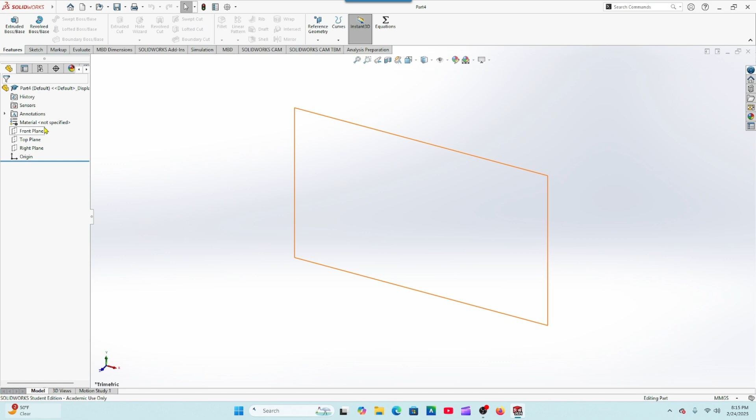We're going to go ahead and open this in the top plane. And I'm going to start with a circle here. I'm just going to do 2. And then I will do one more, like so.

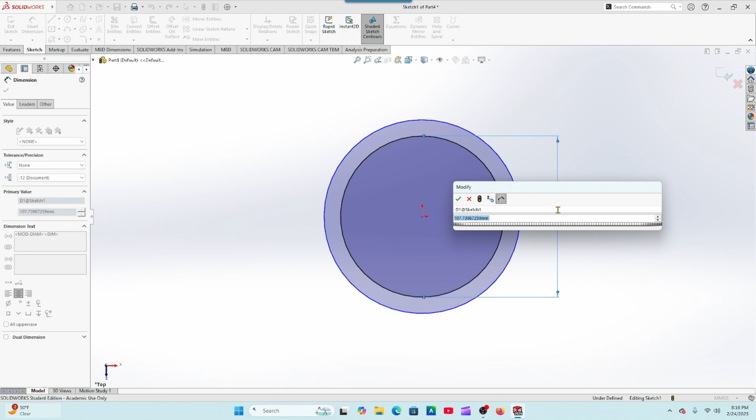And then what I'm going to do here is I'm going to do this one to 145. And then I'm going to do this one to 160, like so.

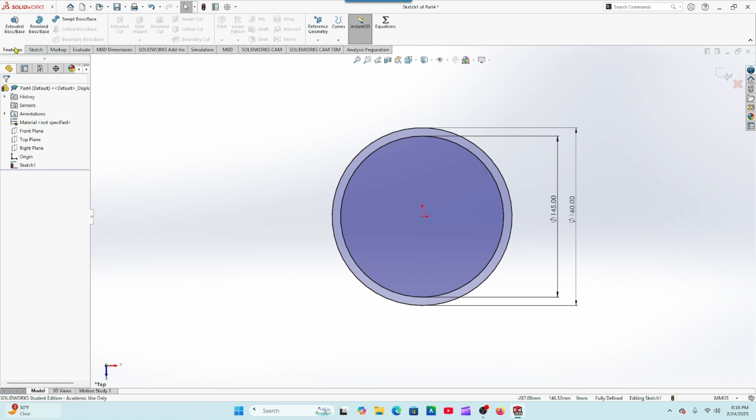And then we are going to extrude this. We have a fully defined sketch, so we're going to go ahead and do an extrusion. And I'm going to extrude it down a total of 50 millimeters, like so. And I'm going to hit the green check mark.

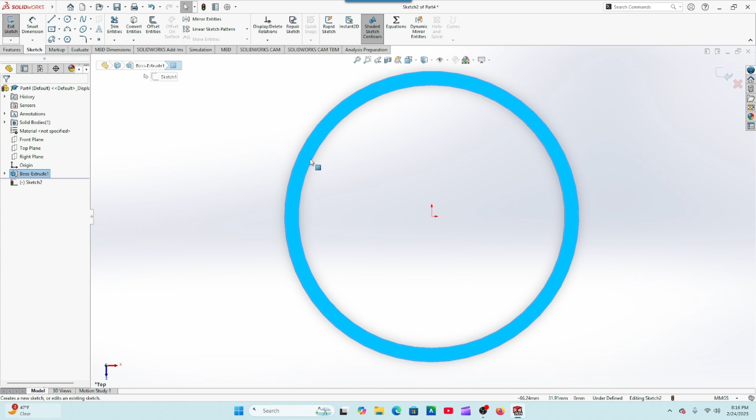Then I'm going to open another sketch on the top here of this. So I'll open the sketch, click off, and then what I'm going to do is I'm going to convert that circle right there, and that's all I need for... well, actually it's not. We'll go ahead and draw on the rest of it since I'm thinking about it.

So we have a bolt hole circle that we need to draw, so I'm going to go ahead and do another circle, and this one is going to be a diameter of 56. I'm just going to draw that in there, and I'm going to make sure that is for construction. And then I'm going to go ahead and dimension that to 56, like so.

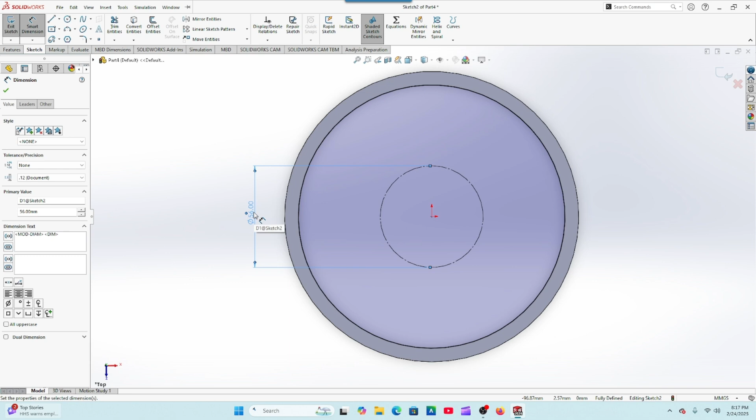And we need another circle in there that's going to have a diameter of 40. So I'll go ahead and draw that in here. Do about 20, right there. And I'm going to do one more circle right here, and that's going to be a diameter of 6.

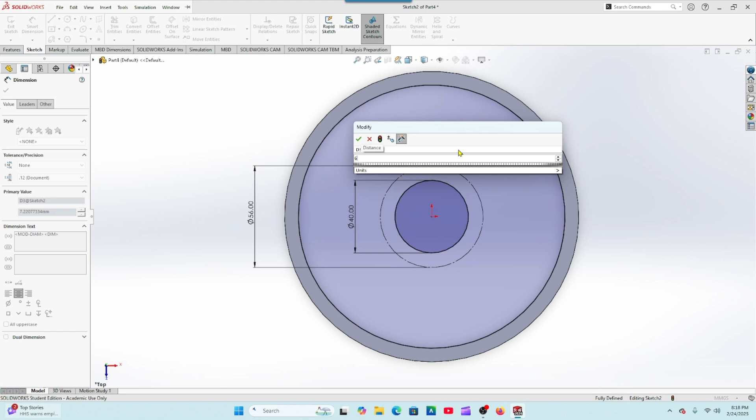Excuse me, so let me go ahead and dimension this one right now. That's going to be 40, so we'll get that one done. And then we're going to do this one, which has a diameter of 6, like so. Go ahead and lock that into place.

And then I'm going to do a circular sketch pattern, and I am going to do 8 right here. And I will select what I need right there. That looks good for what we need. So I'll go ahead and hit my green check mark. And then I'm going to go ahead and fully define.

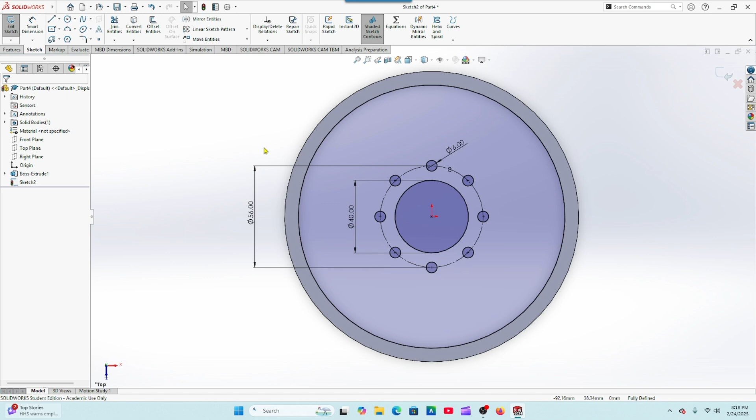Got everything locked in. So now I can do an extruded boss/base. And what we're going to do here, I'm going to change the direction, and I'm going to offset this one from the plane 5 millimeters. And I'm going to make sure I change the direction because that's how far I need it down.

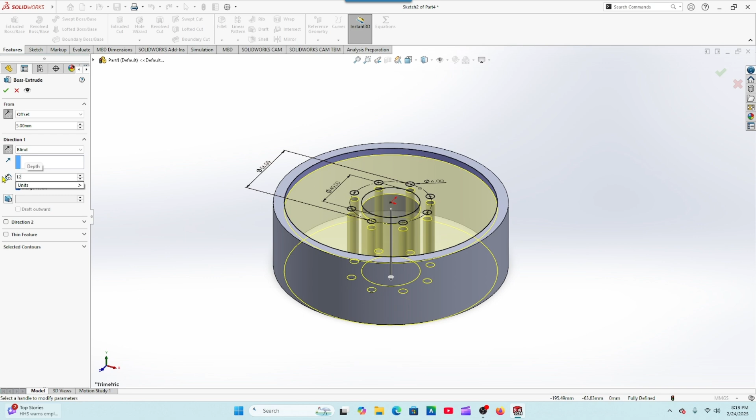I'm going to go blind here, and I'm going to set that at 12, which that locks that into place. So we're good to go there, just like so. All right, hit my green check mark, and I am locked in right now.

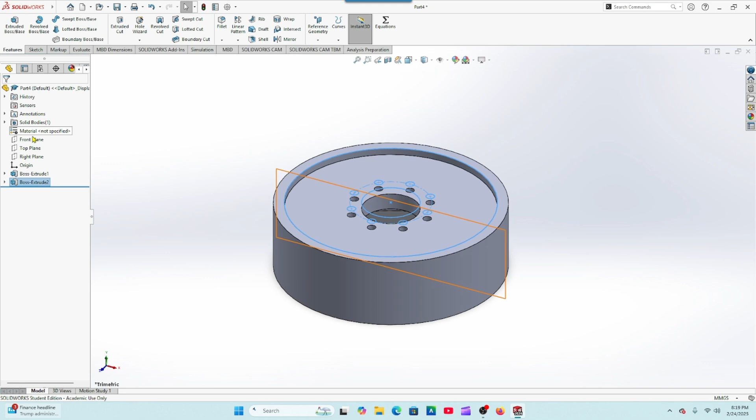So we got one more feature to do, and I'm going to do that in the front plane. So I'm going to go ahead and open up a sketch. And what I will do here, I'm going to go ahead and do a 3-point arc. And I am going to start it from here, and I'll just come out like so, kind of make it like that.

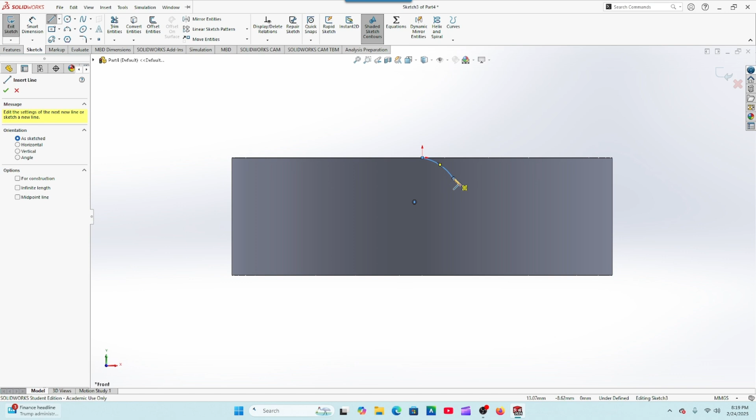And then I'm going to go ahead and do a line down to here. Lock that into place. And right click and select.

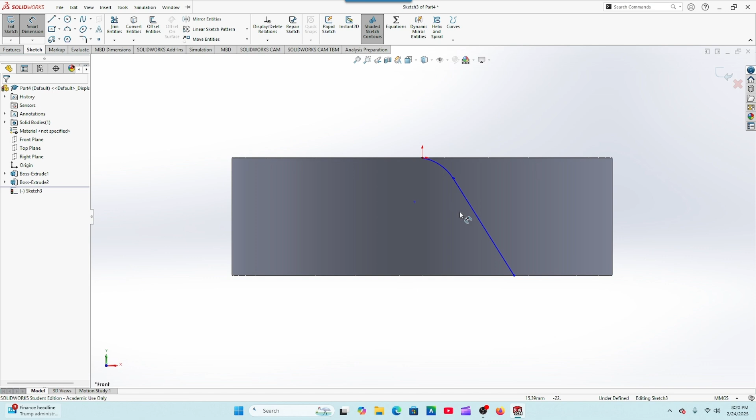Needs to be offset by 2, but I'm going to do some dimensioning here. This needs to be 45 in length, and this needs to be 25, like so.

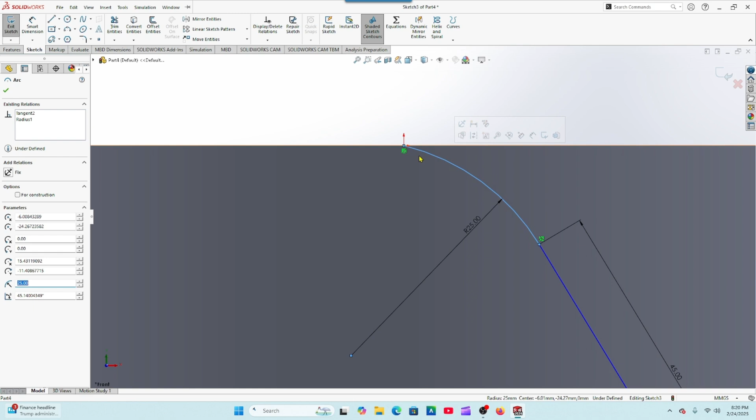And then I'm going to hit my green check mark, and then what I'm going to do is I'm just going to hit this... oh, sorry, wrong one. We'll go ahead and hit that, and we're going to hit this, and we're going to make that tangent like so. Now everything is locked in place.

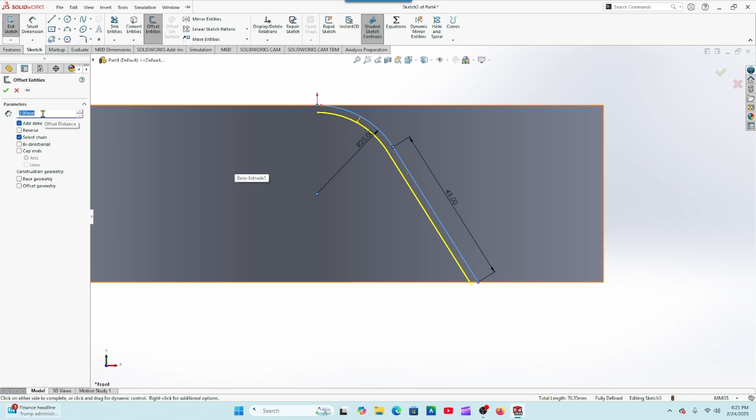And then what I'm going to do is an offset, 2 millimeters. We're going in the right direction, so I'll go ahead and make that 2, like so. I like the look of that.

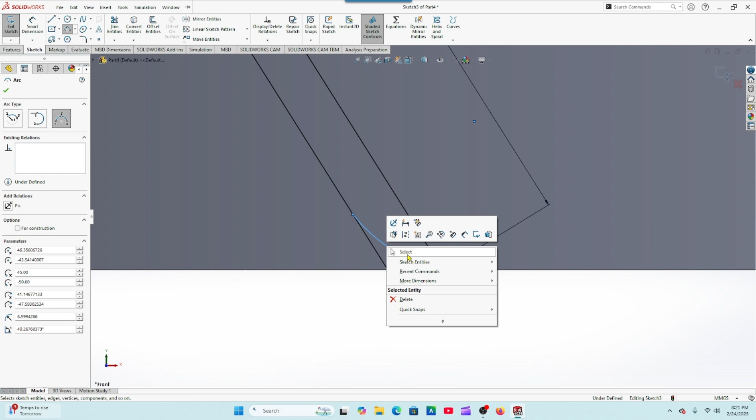And then I'm going to do another 3-point arc, and this one has a radius of 5 millimeters. So I will just click right here, and I'll click there, and I'll put in a radius right about there. Then I'll dimension this to a radius of 5, like so.

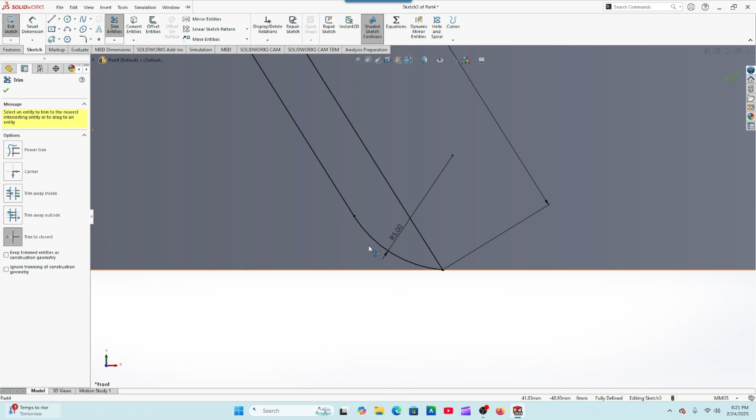And I'm going to click this, hit control, and make that tangent. That locked everything into place for me. I can go ahead and hit the trim button and trim out this portion right here. My green check mark. And then I need to draw in my line here to lock that in place. Right there.

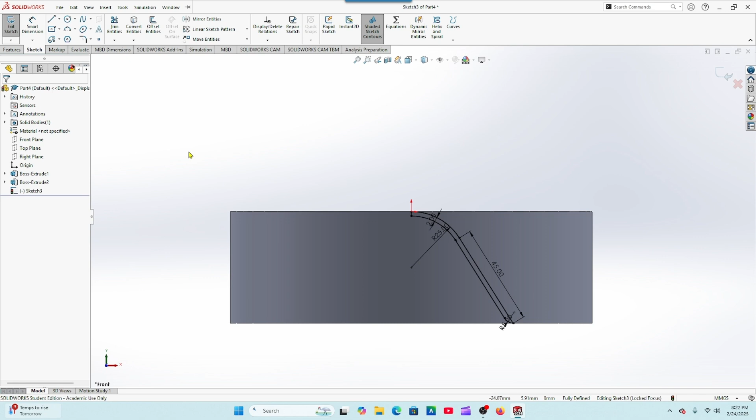All right, so now what we're going to do... you know what I did not do? That's what happens when you get ahead of yourself. So what I need to do is redo this sketch, but now that we've done it, it's going to be a lot easier.

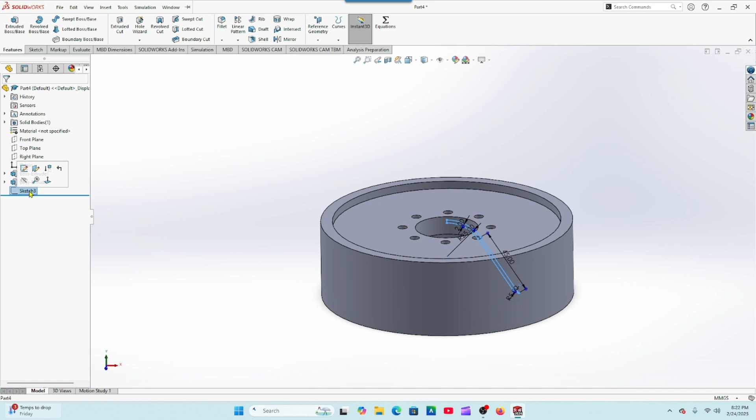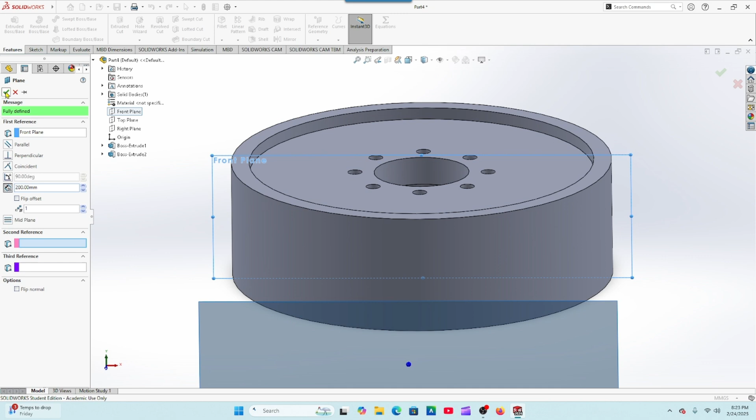So I'm going to exit out of this sketch. We'll right click and delete. And then in my front plane, I'm going to make sure I'm normal to it. For reference geometry, I'll go ahead and make a plane. I am going to make it to the front plane, and I can offset this 200 millimeters out that way. That's what I should have done first. Got a little ahead of myself, but that's okay.

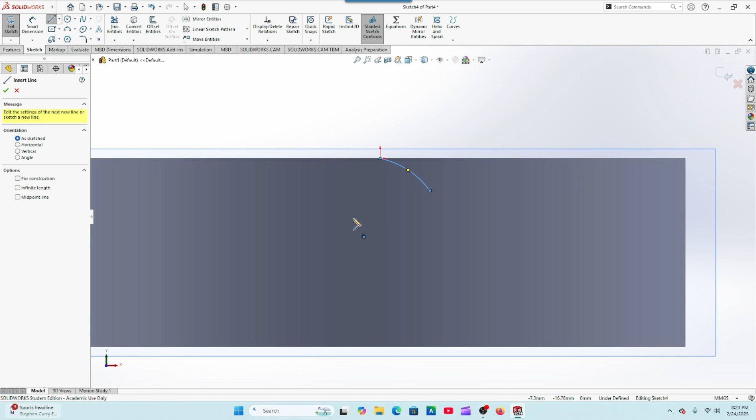So what I'm going to do is just a 3-point arc again. This one should go fairly quick, right? We'll say right there, lock that in place like so. And then we'll do a line coming down to here. We'll hit that point. We're going to be good.

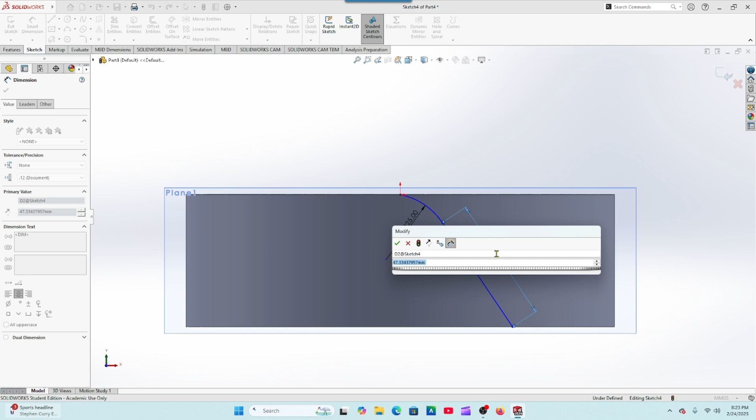And then I will smart dimension this to 25, like so. Smart dimension that to 45, like so. Get my green check mark. And then I'll click on that radius, control, click on this line, make it tangent. I have everything locked in there.

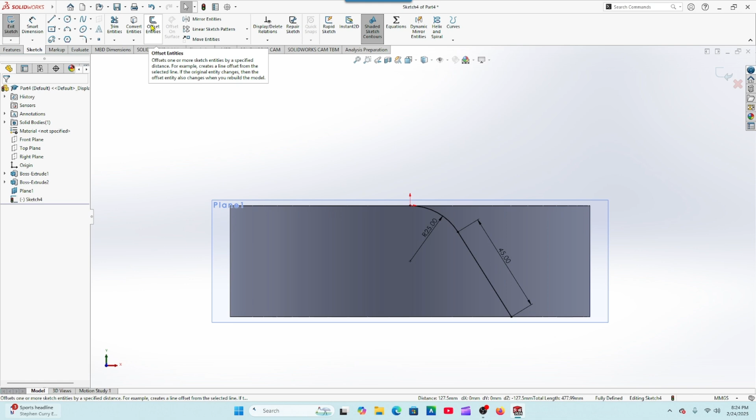It's all fully defined. Then I can offset these two to 2 millimeters, which is already selected. We're good to go, it remembers what we did last time. Go ahead and draw in my line here, like so.

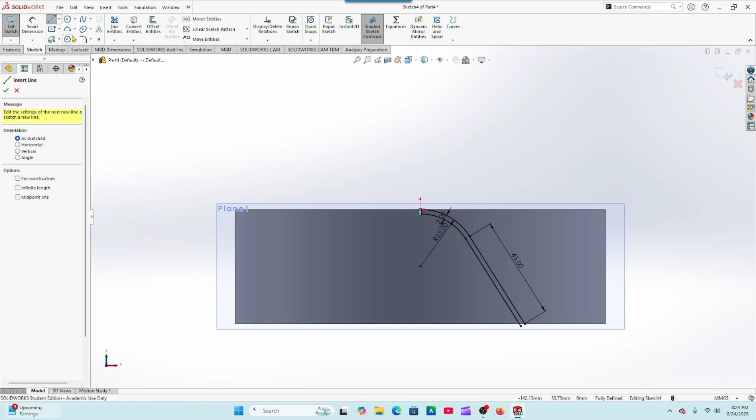And then we'll do another 3-point arc right here, just going to come over here. We're just going to kind of wing it like that. And then we'll smart dimension that - that's a radius of 5 millimeters. So we'll hit 5.

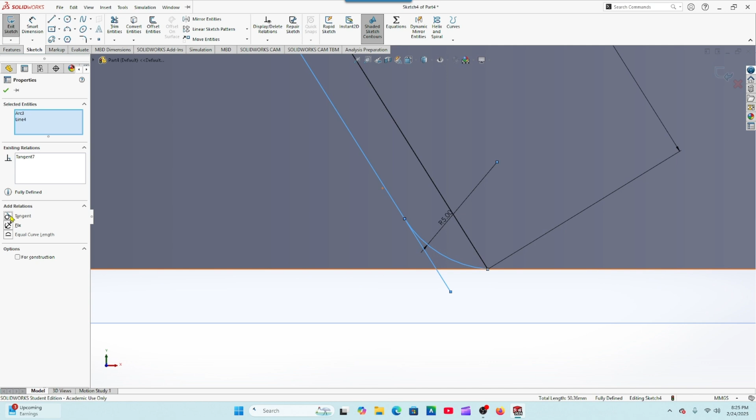And then we need to hit control and select this one, and we'll make them tangent to each other. And then come into our trim tool, trim that out, and now we have a fully defined sketch.

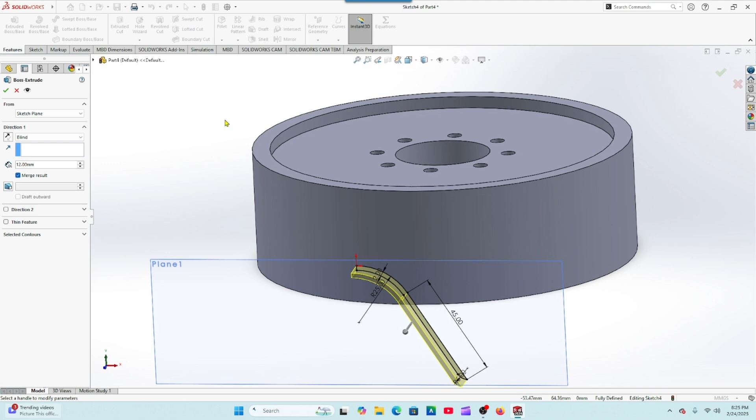So we'll come over here, we'll do an extruded boss base, like so. And then I will change direction, and I'm going to bring it up to a surface, and I'll just click that surface right there so it hugs it all the way around. And if I do that around like so, I will be good to go.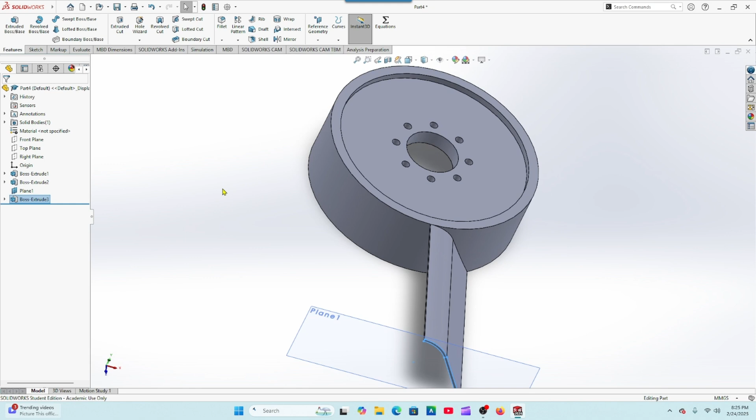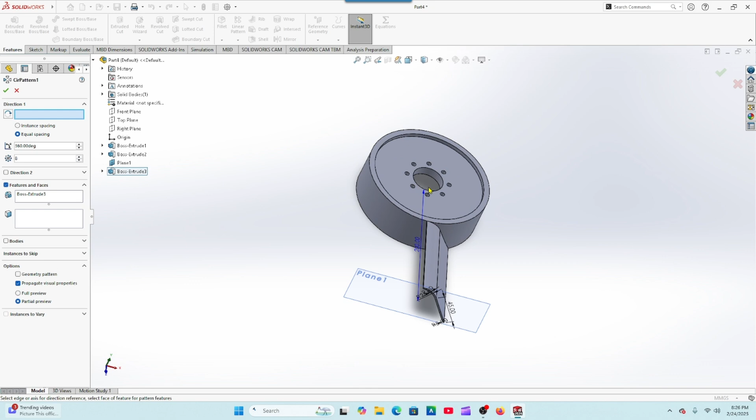So then the last thing we have to do is a circular pattern on this one, and it has our boss extrude. Let's make sure it's got the right one. Yep, it certainly does. And we're going to make it 8. It remembers that, I'm going to go ahead and lock that in like so. Hit the green check mark. And we are done. We'll go ahead and hide that plane. And we're done.

Like so. Let's go ahead and look at this from the top like that. So let's go ahead and save this drawing.